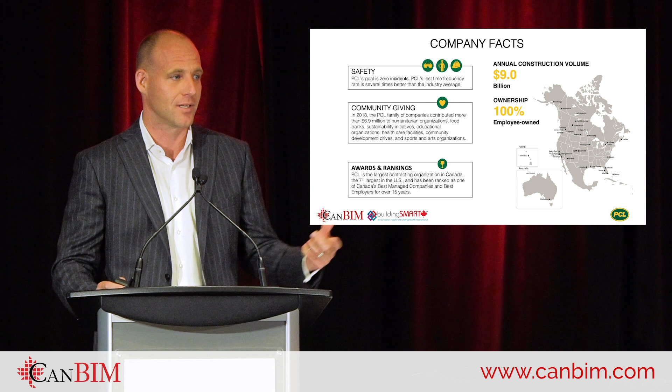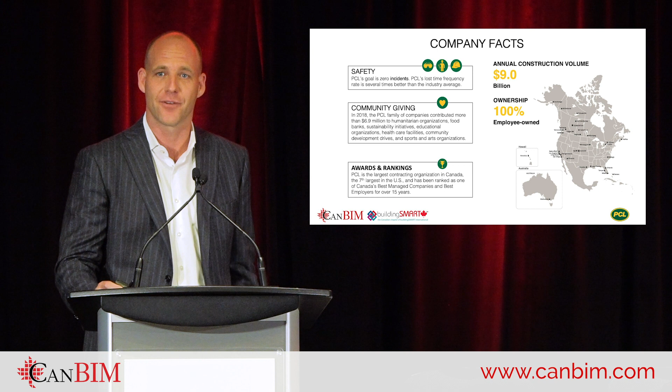It's a change and it's an uphill journey, but it's pretty exciting when you get the fruits of the labor. So what I want to do today is show you some of the value creation we got out of our actual projects built and deployed in Toronto, some of the challenges as well, and hopefully some discussion after this as the night carries on.

The market sectors we perform in North America are our heavy industrial area, primarily Western Canada, Alberta, oil and gas and energy, buildings world, heavily in Toronto and Ottawa, and our civil infrastructure side, which is spread more or less around the south in the US.

What I love to say is we're smashing industrial and buildings together. It's that systematic, process-driven mentality that we have in the industrial side. Let's be clear, it's not that sexy when you look at an industrial project, but we bring that way of thinking into our buildings. Whether it's a full volumetric module, whether it's a decoupled element, there's various ways to skin the cat and not one solution fits all.

But with that way of thinking, that bit of standardization, once we figure out our customizing, we can bridge those two worlds. So in Toronto, we have a facility here. It's about 65,000 square feet. We've been in it for 3 years. It's been a 7-year journey in Toronto.

Again, design, we're heavily involved in design, we manufacture, we manage a supply chain. So we have become a bit more vertically integrated, not like Katerra vertically integrated, but we are vertically integrated amongst PCL. Why did we invest in these efforts?

I think the first bullet here is the most important to mention, would be address the skilled trades gap from a quality and a quantity perspective. I think the metric is something like 200,000 or 220,000 workers are needed in Canada in the next 3 years. That's a really big gap. And we're not saying that offsite or modular construction is going to solve the problem. It's going to be a tool in the toolbox to help us bridge that gap.

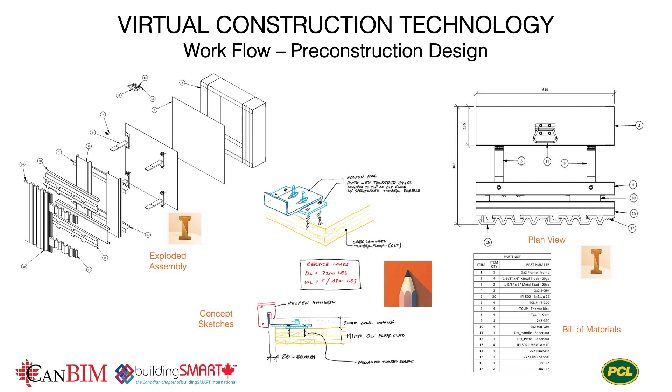A bit about our workflow. Workflow is everything to us, every step of the way. It can begin with a sketch. These sketches used to be done on napkins. At least now we can put them in the digital environment and not lose the napkin. Once we have that napkin sketch done digitally, we can then create a 3D model.

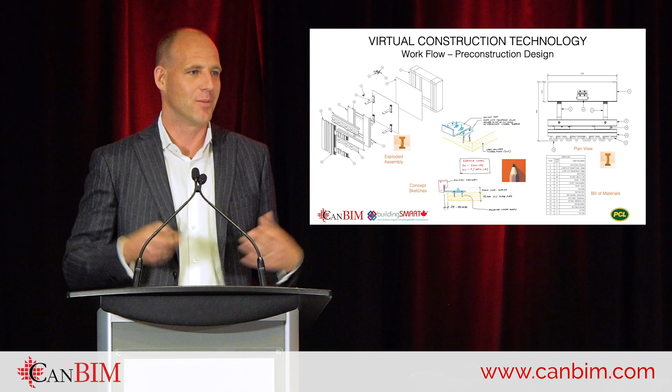We do that in Inventor, that's a tool we use. We explode that model then, we try to break it. And as we break that model, all the parts and pieces fall out of it, and we generate a bill of material. That bill of material takes us on to the next stage of our cycle.

Here's just a rendering using Lumion to show you a wall panel assembly that we've built up. We use this to educate the owner on what they're going to get, and how they're going to get it.

Flipping it over to the parametric, once you have your parameters set, we can work through multiple iterations of what that wall panel composition needs to be. And then physically, okay, we did it digitally, let's build it physically, and then we get the buy-in we need to do something perhaps a little bit differently.

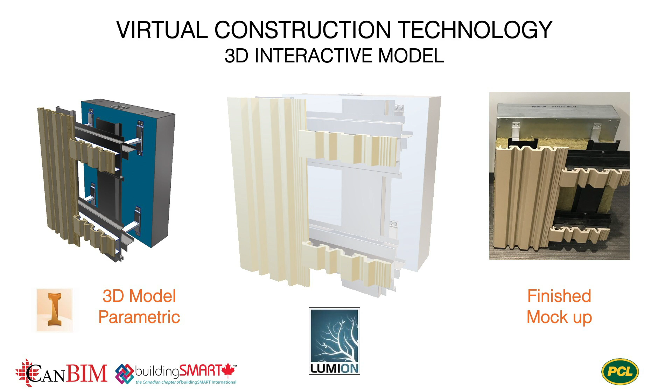Some projects now - these are projects we've built in the Toronto market out of our shop at Agile and shipped around the GTA. This one here went to Pearson Airport, a fairly significant structure. It was our biggest module we built to date - an access egress walkway, I believe 85 feet long and almost 100,000 pounds.

If we think about logistical concerns of working at an airport on the live side, I'll share with you - we had a 4-hour window to do that install each evening. If we don't get it right, we have to demob and remob the next day. And it's not like we're demobbing 20 feet away, we're demobbing across the airport with a security escort to a quarantine zone. So in some cases, the offsite modular method makes nothing but sense.

It is, again, the walkway. Cool fact I want to add - when that left the shop, it was 190 feet from tip to tail of truck, front to back. A lot of people ask, how big can we ship? As long as we have the right route surveys and everything in play, we can ship some pretty significant things through this infrastructure here in the GTA as well.

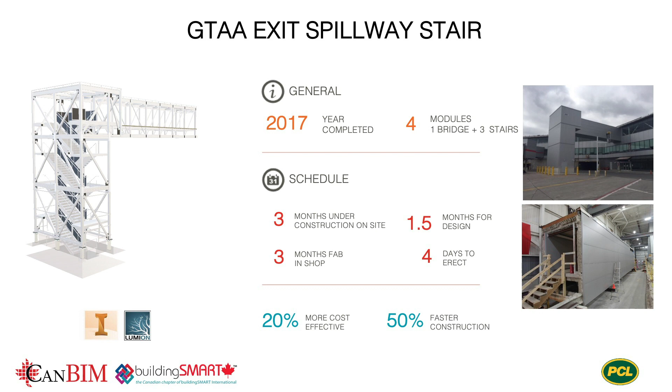Some metrics - these are compared to our traditional build approach, to our budgets, to our baseline schedules. I believe this is understated - 20% more cost effective and 50% faster. A lot of people ask, is it cheaper? I'll say a lot of times we're cost neutral. We can be more expensive taking this approach depending on the parameters at site, but it'll always be faster.

Time is something that we put a lot of value on, and so do our clients, especially in the affordable housing challenges that we're having. A lot of these behaviors, this way of building, applies in parallel to that world as well.

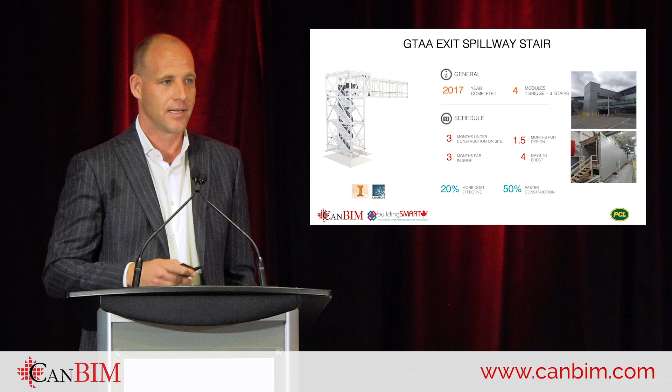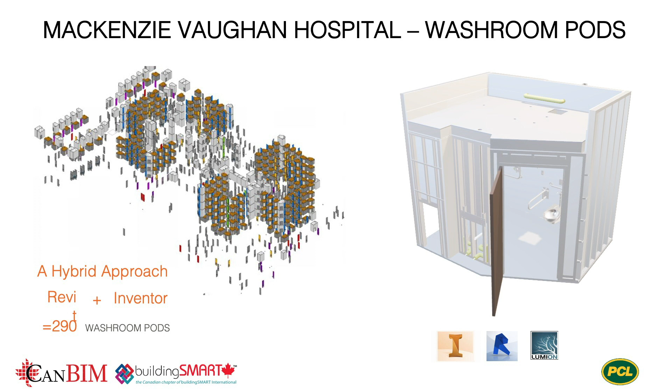So washroom pods, plenums, the lungs to the hospital, the intake and the exhaust, and some other decoupled elements, hand wash, eye wash stations. We used a hybrid approach with Revit and Inventor to create the model, off the model to create our parts drawings for our pods, and the standardization effort landed us 290 washroom pods.

Key thing I want to share here is it was a bit of a pain point - it wasn't a moment zero item. This is not what we started in plan when we built MACKENZIE Vaughan Hospital. We didn't have defined that we were going to take washroom pods and plenums off site. We decided later in the design phase. So imagine how challenging that is to flip and then get everyone to flip with you.

That's not the most exciting time. So in this case here, we started at level 4. We left 1, 2, and 3 go, and we started at 4 to get to the washroom pods. We actually had at first 130 different variations of pod, and through the VE and standardization, we got down to 8 with mirror images, and that's what got us the 290. So just key point, moment zero, make it part of the plan - it's going to be easier on all stakeholders involved.

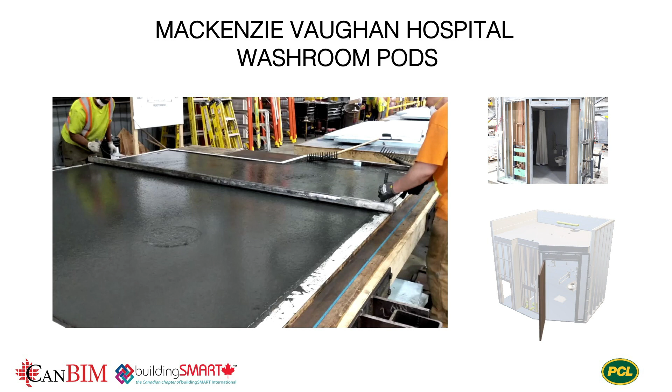Here's a video - there's no audio to it, so I'll kind of talk over. This is the flooring system that we put in place. In a hospital, we got to get a 2% slope down to the drain. So we did that in concrete, fiber reinforced concrete with our CNCs to make sure we get the 2% slope. That was 12 millimeters thick at the drain.

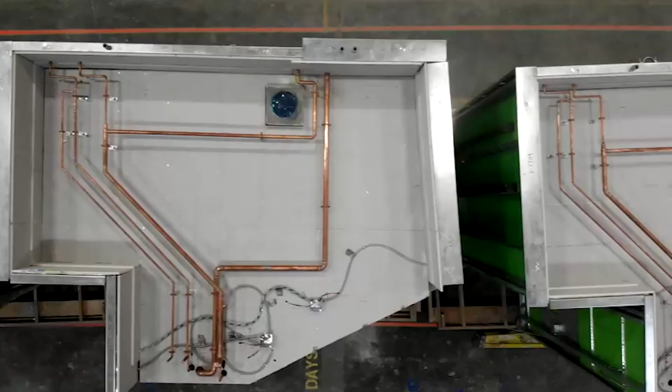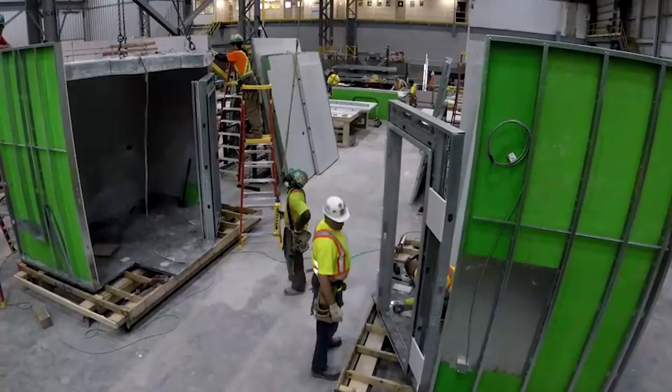You're seeing the workers in the shop here - that's the rate they move, which is just awesome. That goes against our 500,000 hours without lost time, so I shouldn't say that. You'll notice in the middle aisle there we have a rolling assembly line - that's actually the roof to the pods. Fully fit out, multi-trade. We put IoT devices in each pod, in every 5th pod, and that detected temperature, humidity.

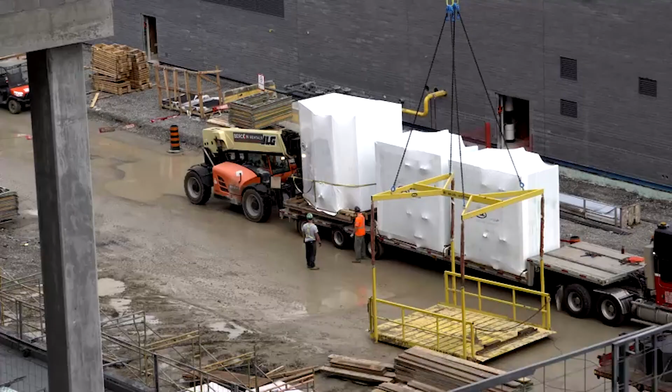And vibration, and we're sampling that data every 5 minutes and incorporating it now into our quality program. You're seeing us lift these pods onto the footprint of the building using an elevated platform. We got to think about the whole cycle and design that element of it in.

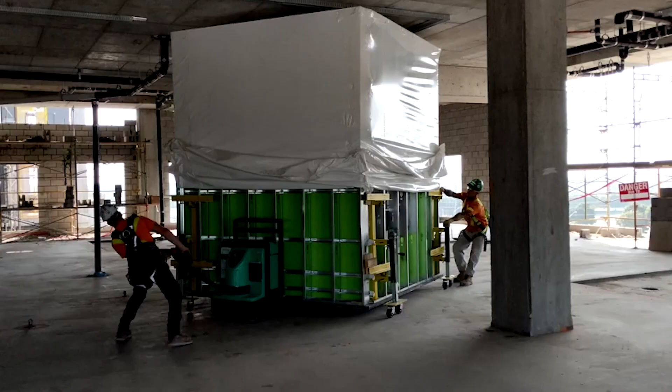You'll see it took 2 to 3 workers to pull that off, 2 to get it to its resting place. It went quick there, but that floor plate was incredibly clean - there was really nothing on that plate other than that 50 mil recess that we're dropping our pod in. So think about the decongestion of site, the workforce removed from site, the materials removed from site. We can focus on different critical activities by building in parallel truly.

Town of Oakville, a library that we put in place, open to the public about 3 months ago. Pretty cool library, had the chance to walk through it. It's 5,000 square feet, not the biggest building, 7 modules to build that 5,000 square feet. And we actually fabricated the canopy structure and the deck in our shop too out of 2 modules, so 9 modules total.

The client in this case, the ask was - and it was moment zero - the ask was, okay, we need facilities quick. We need to be able to relocate those facilities as well, but they can't feel temporary because they had a nasty impression of what modular was in the past. So we can help rethink that through the digital environment, model it out, get it all thought out.

So we were quickly able to deploy that library, 2.5 months in the shop, and I believe it was 25 days to erect it on site. The feedback we got, because it was outside the Sixteen Mile Sportsplex - anyone's from Oakville - is we didn't know what you guys were doing, you did some work at site, you disappeared for X number of months, and all of a sudden we had a library. That's the kind of feedback we like. Minimize the disruption at site.

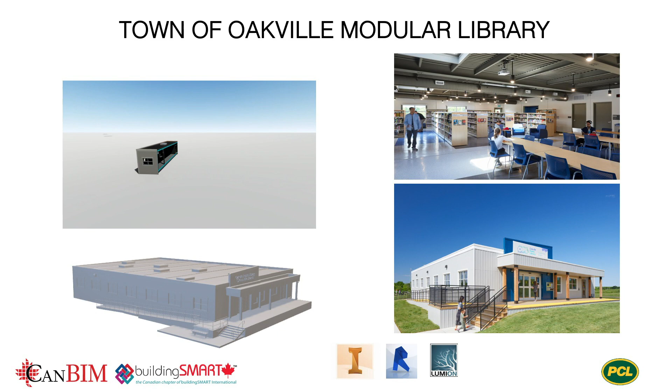Just some renderings here - some of the tools we used to show the owner what they were going to get, how they were going to get it, showing the module stacking. The images on the right are actually finished photos of the library itself, skylights and all, and the finished product. So very close to exactly what we wanted to produce with a happy owner.

We're just doing it in a controlled environment, faster, to a higher degree of quality, and safer. We're also doing it with less impact on the environment.

Lean Construction Institute says it's 50 to 55% wasted energy in a traditional way that we build, which is hard for a GC to say. The 8 deadly wastes include overproducing and underutilized talent if the work front's not available.

We find in our environment we get 5 to 10% waste in all those forms. So it's a very significant change, and what a responsible way to build by adopting manufacturing principles.

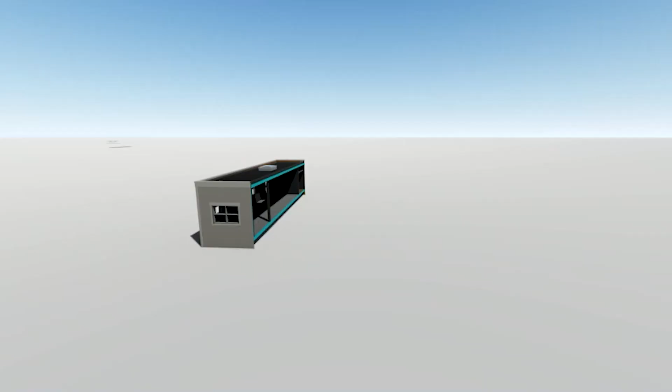Which is pretty cool. Managing capacity can be a challenge. It does ebb and flow.

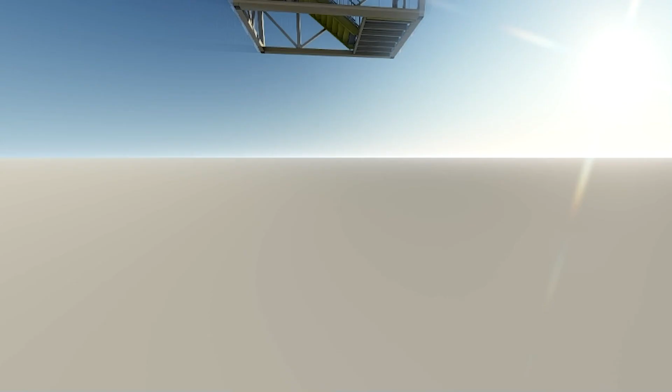Here's a project we're just getting set up right now for: 700 University modular stair. The ask from the client is, we have to densify our building, so they need better means of access egress. We can quickly deploy the 18-story stairwell structure in the shop, minimizing impact at site.

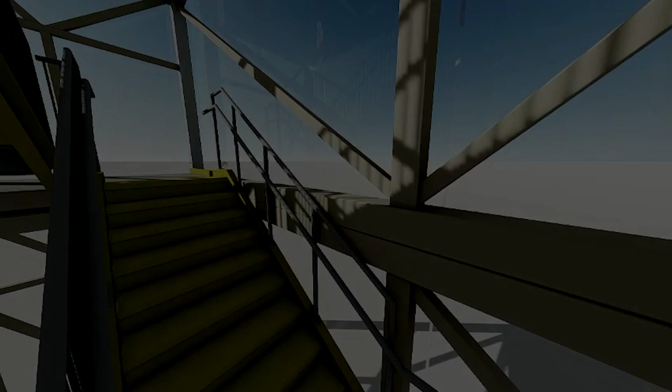The conversation is now about adding a couple other stories to it, and then we procure steel and get into building mode and deliver that with minimal impact to site. Pretty pumped about this project for sure.

So just in summary, I want to leave some time for Q&A. Hopefully we get into a bit of discussion after this.

Again, key layers why we invest in this so heavily over time: bridge the skilled trades gap. It's very real. Enhance the knowledge transfer. We're seeing the gains of that right now.

There's nothing more rewarding than flipping someone who says, I've done this for 30 years, I've done this for 40 years. Well, hold on, come into the shop, we can come to a better way. And then you flip that individual. It's a very powerful moment, and the ripple effect to others is beautiful, to be honest.

We compress our schedules, running things in parallel, enhancing productivities through automation, de-risking our jobs from an exposure hour perspective on the HSE front. Stuff we're doing on the leading edge of the building, we're now bringing to ground level and erecting that up as one unit. It might need more crane time, that's fine, let's design with that in mind.

We're minimizing the impact at site, making it safer and to a higher degree of quality. Better adopting new technologies in a controlled environment, we can do this. We focus in on the scopes we're working on. We can do all types of digital transformation in this world.

I find there's tons of parallels in affordable housing. We're not building homes ourselves at PCL, we're building res towers, yes, but I believe all these principles absolutely apply to the challenges we're living day to day. And we're seeing this momentum pick up.

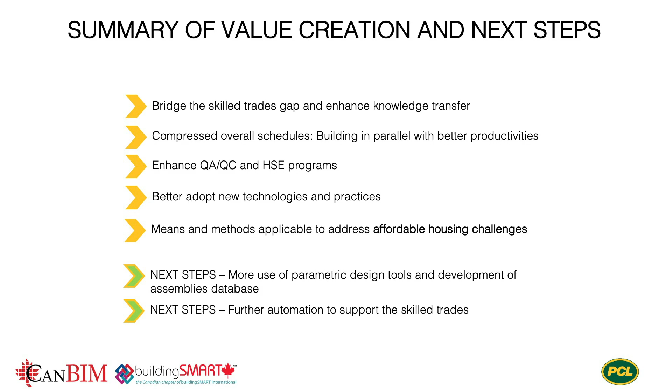That 200,000 person gap that we have, it's not going to go away. This is going to help bridge it. I don't believe we're ever going to catch up in that sense. Maybe in 50 years, but who has a crystal ball when you look out that far? I know I don't. I would invest further if I did.